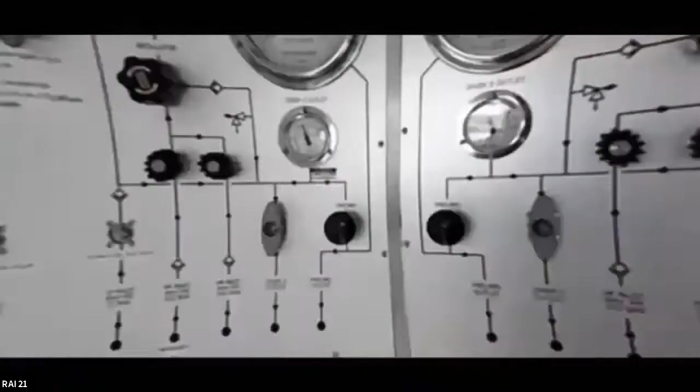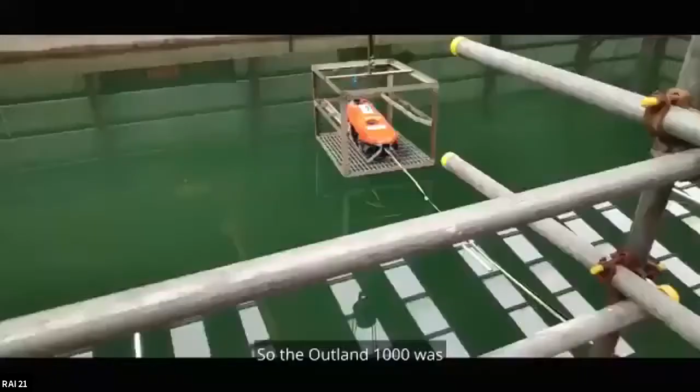So the technology that we're bringing from the oil and gas industry and demonstrating today is around cutting underwater. We've deployed 3 ROVs as part of this collaborative approach today to demonstrate the capabilities. The Outland 1000 was the first one to be deployed, and alongside that we had the VideoRay Pro 4. Today's been a good collaboration between the innovation teams and the end users - all in all, it's been a really successful day.

Demonstrations again at the dive team in WASDALE, and what we're doing today is to allow people to see the capability of what these ROVs can do for us. Having that ability to draw on other sectors in order to demonstrate what we're able to do, also allows us to get all aspects of both end users and operators in technical demonstration. We've brought experts in and we've made a difference.

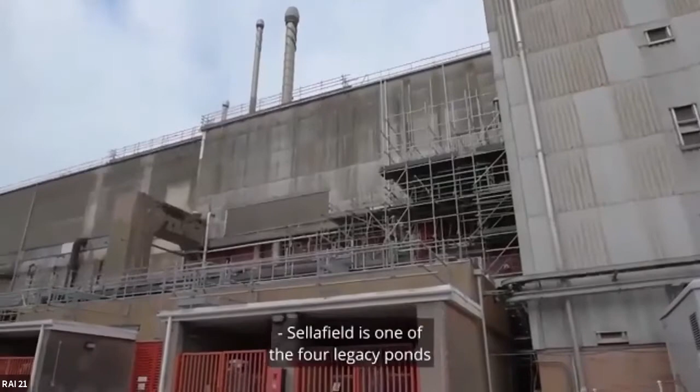Sellafield is one of the 4 legacy ponds and silo sites. The site comprises of 24 concrete silos that have been built in the early 1960s and extended 3 times since, and are still undergoing decommissioning. Each silo is the size of a double-decker bus, housing the waste within a body of water.

The site has never been designed to be emptied, so no plan was in place for removing the waste from these silos, making it challenging as the waste retrieval solution has to be designed around the current silo that can operate in a safe and reliable way.

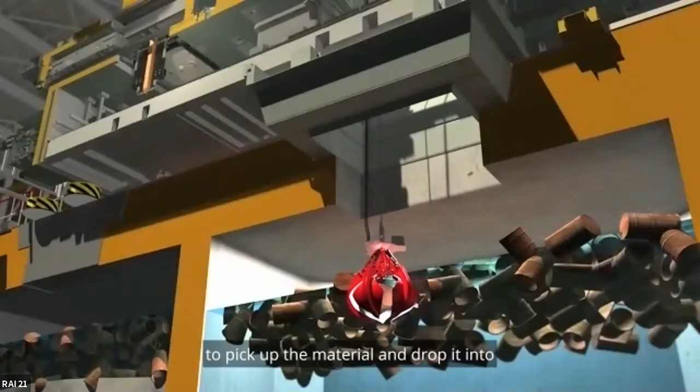Current removal operation consists of a large machine enclosing itself around the silo, which has a grabber that is lowered into the silo to pick up the material and drop it into an enclosed waste bin to be transported and treated, then safely housed, which will ultimately reduce risk to the public and overall costs.

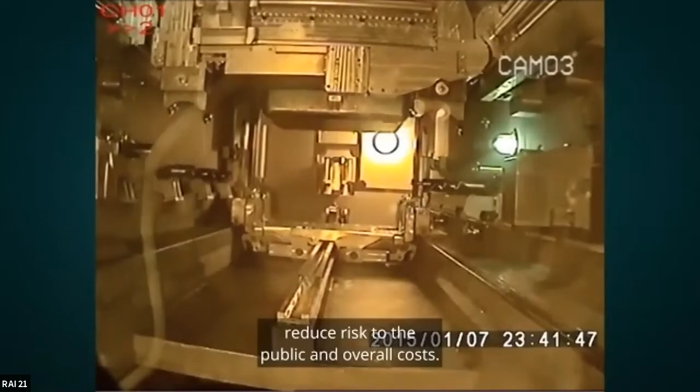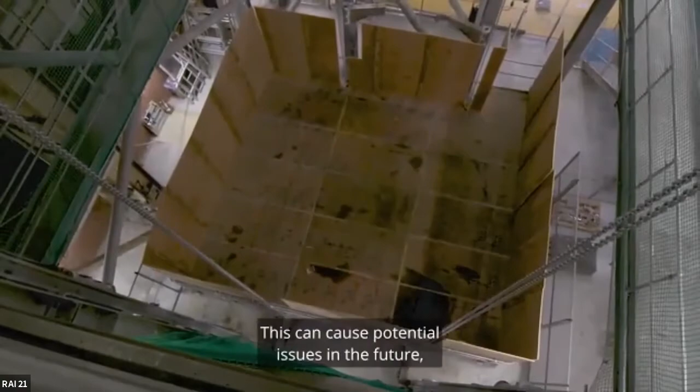Looking ahead of time, we can see that the current removal operations are mostly clearing out the center portion of the waste, leaving a buildup near the sides of the silos. This can cause potential issues in the future, one of which is not being able to clear the material around the edges, and another where the swarf collapses on itself, potentially trapping the grabber during its operation.

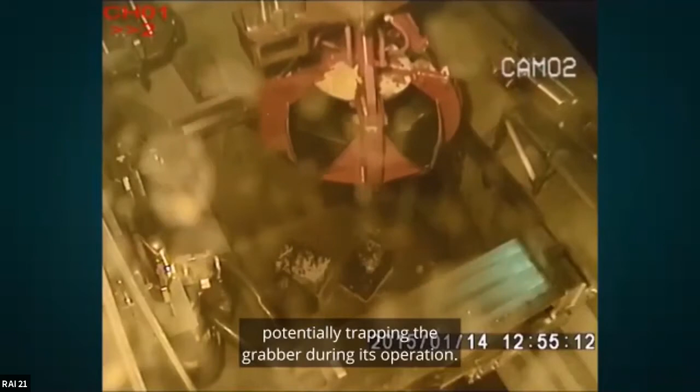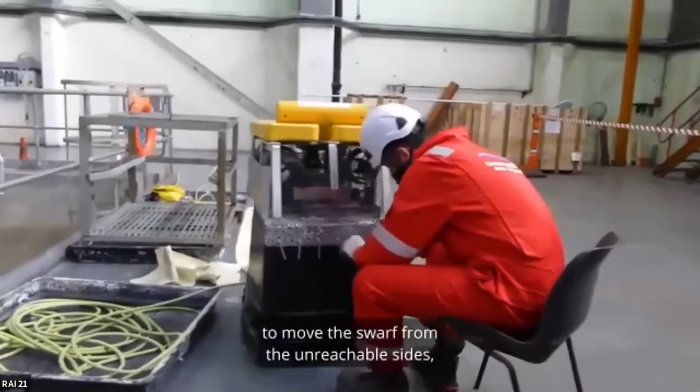To combat this, we are investigating potential solutions for the future, one of which is making use of an underwater remote operated vehicle, or ROV for short, to move the swarf from the unreachable sides, leveling out the waste and moving it into the space reachable by the grabber.

National Nuclear Laboratory, NNL for short, carried out the investigation on the potential of introducing the ROV as the solution, where the trials were conducted at the NNL's Workington site with the help from Underwater Vision ROV specialists, who supplied and modified the ROV for moving the swarf and sent trained professionals to operate it during these trials.

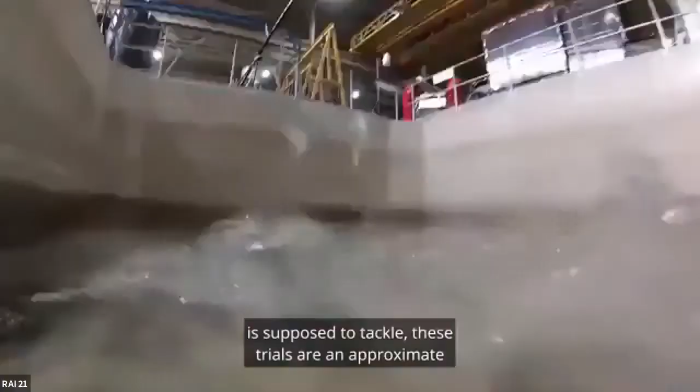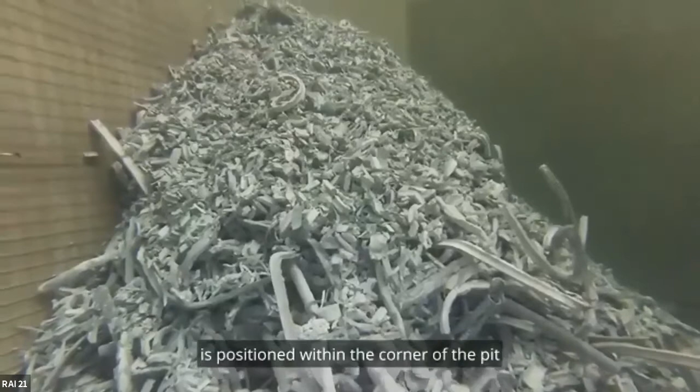To create similar conditions for what the ROV is supposed to tackle, these trials approximate what is expected to appear within the silos, where a simulated Magnox alloy swarf - just like the real stuff but without contact with nuclear material, so it's safe to be around - is positioned within the corner of a pit to simulate a buildup of the swarf.

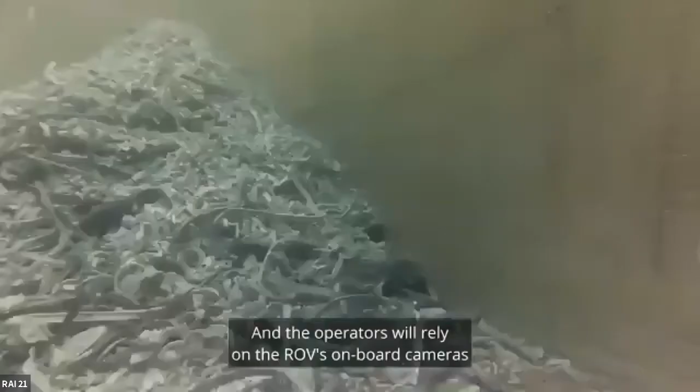In real-life applications, no one can enter the silo due to the hazardous material. To mimic these conditions, separating screens have been set up as a wall between the operators and the ROV, and the operators will rely on the ROV's onboard cameras to have a direct view of the scene, just like in real-life conditions.

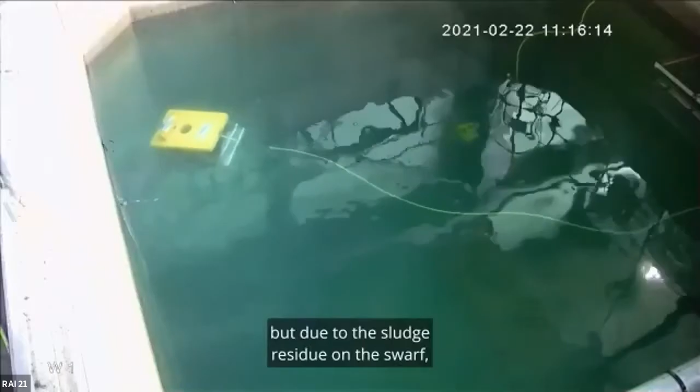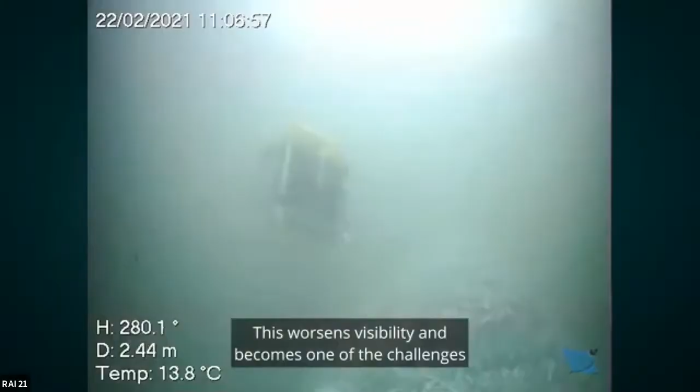The pit we're using to demonstrate the ROV is filled with clean water, but due to the sludge residue on the swarf, which is a further degradation stage of the swarf, the water becomes slightly clouded, which is what the water is within the silo too. This worsens visibility and becomes one of the challenges the ROV operators have to deal with.

During the trials, we've also had several cameras set up around the pool to capture the performance of the ROV as it shifts the swarf. We included another ROV equipped with an onboard camera to provide a third-person view to see if it will assist in operations, and to provide a safe and flexible method for recording footage underwater.

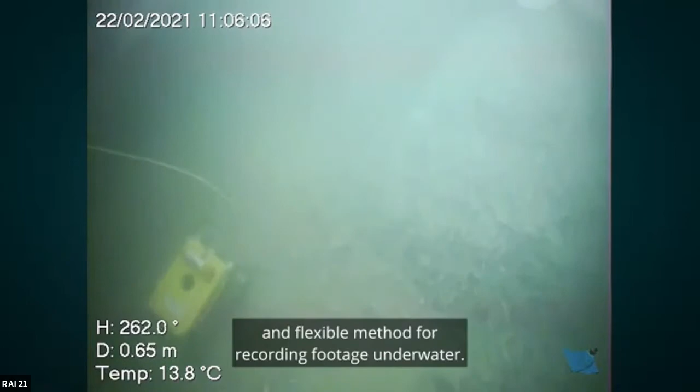The goal of these trials is to assess how easy it is to operate the ROV, to move the swarf, to find out if it's powerful enough to move and dislodge the swarf from the waste pile, and to evaluate the rate of volume shifted.

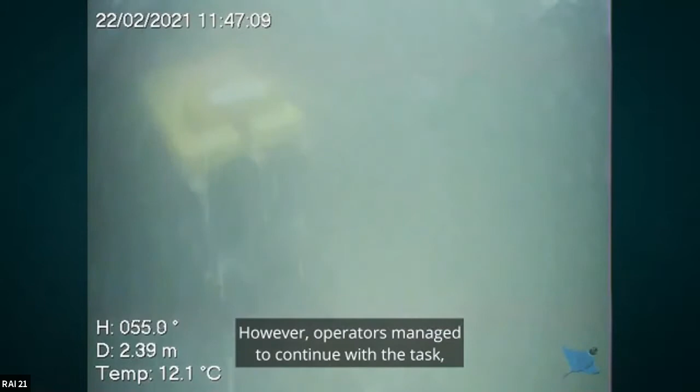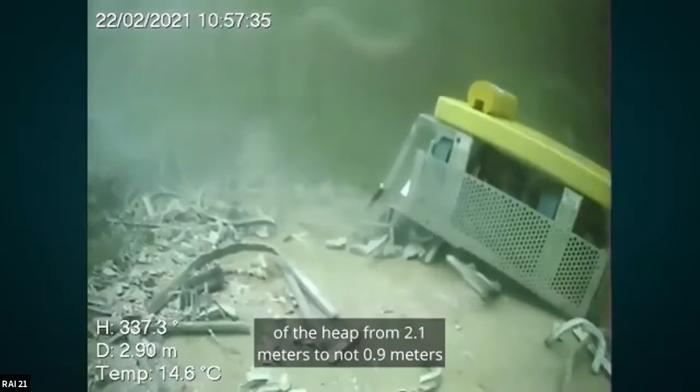During these preliminary trials, the visibility with the water became quite challenging. However, operators managed to continue with the task, shifting a significant amount of volume at a rate of 0.63 meters cubed per hour, and reduced the height of the heap from 2.1 meters to 0.9 meters across the 5 hours of trials. Overall, these trials have been very successful.

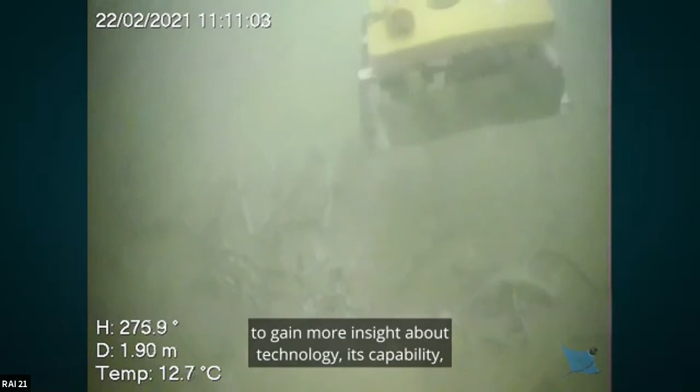It's given Sellafield and NNL the chance to once again reach out to collaborate with external companies to bring innovative solutions and the opportunity to gain more insight about the technology, its capability, and suitability on site in the future.

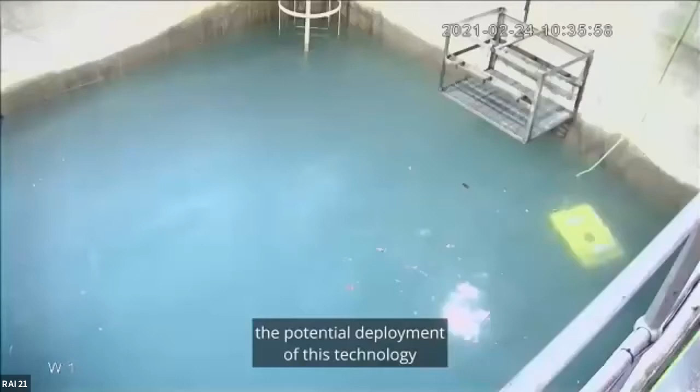The work towards implementing this technology will be reviewed and further investigated to ensure the potential deployment of this technology in the nuclear sector is done with confidence, reliability, and consideration for the future.

Now, James Kell will introduce some of the work being undertaken at Rolls-Royce to develop ways to inspect and maintain jet engines in situ.

Hello everybody, my name's James. I work for Rolls-Royce. I'm a technology specialist in the field of in situ inspection and maintenance. So what that means is we're interested in development of tools or techniques that we can take to an engine that's installed on an aircraft and perform some sort of surgery on it.

This enables us to ensure that the engine stays on wing or as part of the aircraft for as long as it's supposed to, and enables us to generate revenue that way, rather than taking it out of service, causing disruption to not only our customer, but to ourselves as well, when we have to put it through our own overhaul shops. So to do that, there's a lot of restrictions that we have around us.

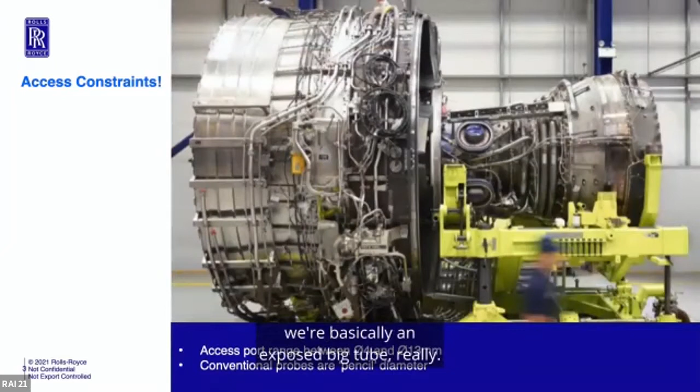So if you see on the second slide, when you walk up to an engine, all of the cowlings are down, and once you lift them up, you see on the third slide, we're basically an exposed big tube, really. And what that tube has is a range of inspection ports that go from about 4mm to 13mm. And that's really all we have as a way of getting inside to perform some sort of corrective surgery.

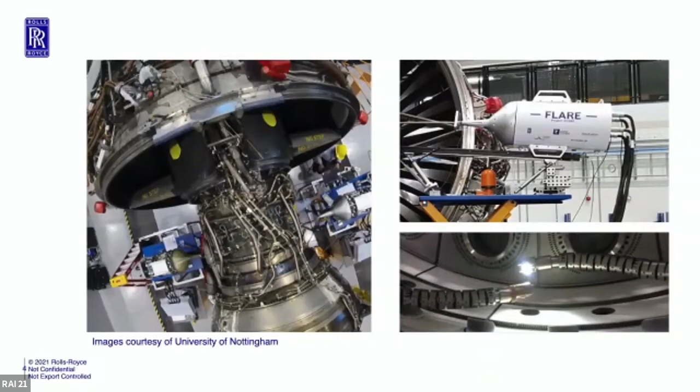And we're pretty good at that. Our teams are very good at going out and performing lots of routine visual inspections or non-destructive testing inspections like ultrasound, eddy current, etc., to look for anomalies. But also we're quite good at performing repairs too, with off-the-shelf pieces of kit, and with lots of skill from our skilled mechanics.

But there are other things we're interested in doing as well, like the more tricky tasks, for example. And that's the kind of thing where we've been looking at developing our own supply chain, because there's lots of this stuff that doesn't exist already.

So we've had to go back to the drawing board in lots of ways and work with universities and other technology suppliers to put together a big, long technology supply chain that results ultimately in a device that we could go and use. You'll see that there's a huge amount of customization that's been placed on those things.

As an example, I'll show you the first video, which is to do with a robotic bore blending device that we devised, working with the University of Nottingham and funded by the Aerospace Technology Institute. You'll see in this video a collection of clips that describe some of the issues we face on a day-to-day basis.

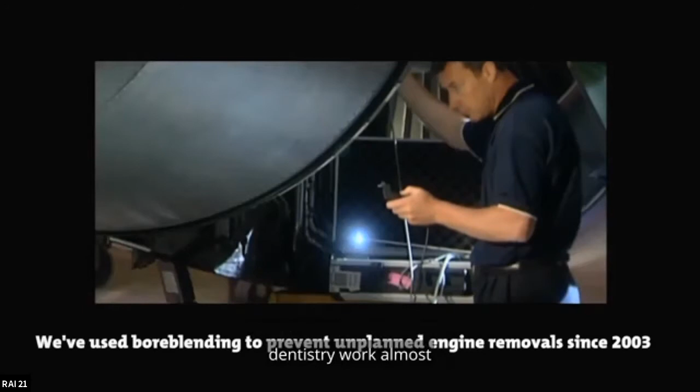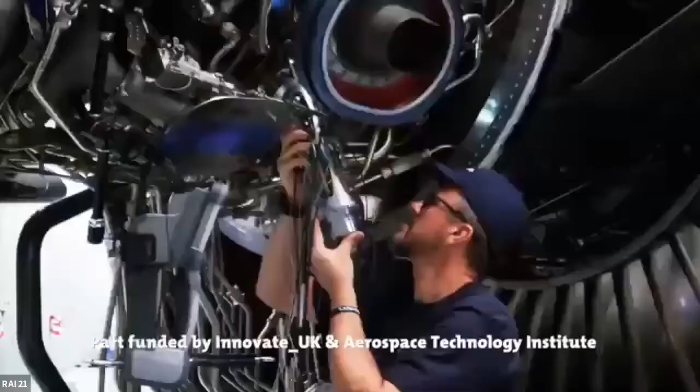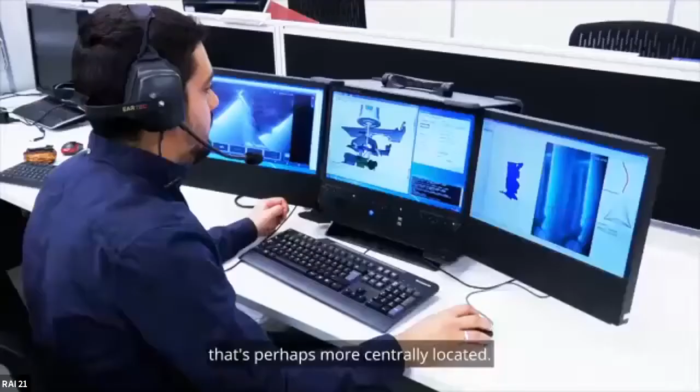We've got an example of a colleague doing some effectively like dentistry work almost on a compressor blade to remove a piece of damage. But what we did with the University of Nottingham in this case is devise a robotic way of doing such a thing. So we thought, rather than sending the person to the job, we could have a collection of robots placed out in the field that could be remotely controlled by a person more centrally located. This means our specialists can be better utilised, and we have potentially a better or quicker speed of response.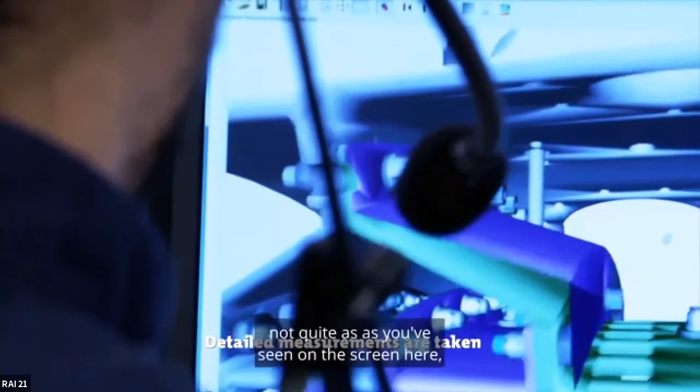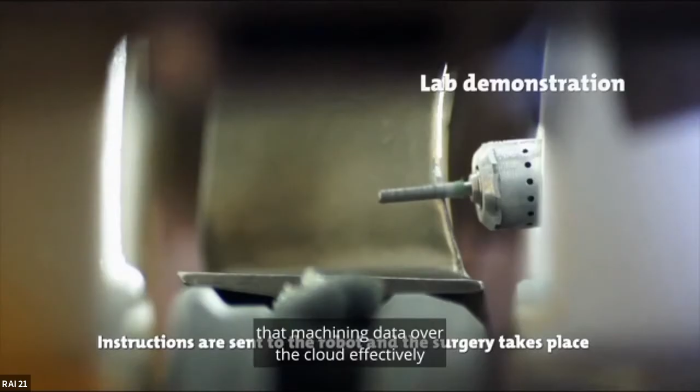So this is all done in the lab at the moment, just demonstrating that in a lab environment. Actually it's a few years old now. We're in a place where we've used a lot of this technology in different ways, not quite as you've seen on the screen here, but what's going on is we're creating a virtual representation of that blade, and then sending that machining data over the cloud effectively to a robot, which then performs the surgery and enables us to put the engine back together and let it go on its merry way.

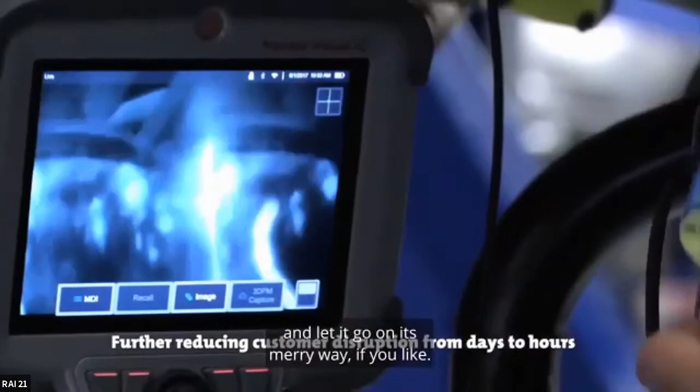So that's one example really of how we've looked to develop our own special tool to provide us with a way of performing corrective surgery.

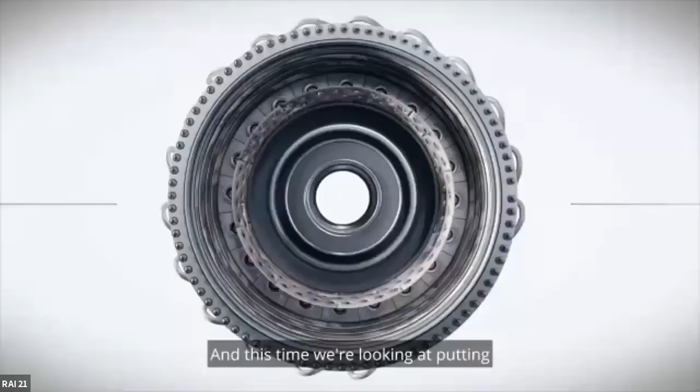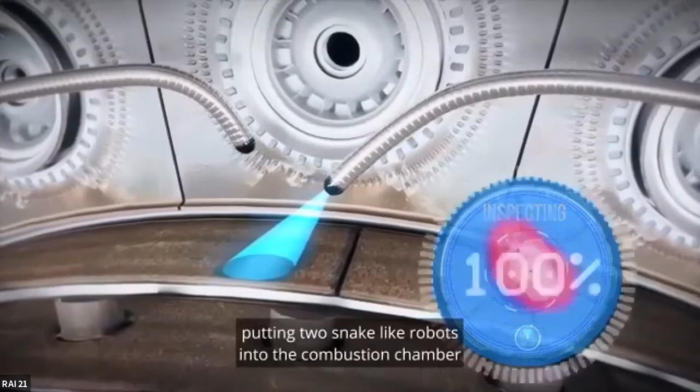I'd also like to show you another animation, this time of another project in a similar vein, both in terms of it being intended for in situ or on-wing use, and this time we're looking at putting a coating back on rather than removing material as you saw in the previous video. In this case, we're looking at potentially putting two snake-like robots into the combustion chamber, so they can work in a collaborative or combined way to firstly inspect the area of coating in question, and then also clean it up and put some coating back on.

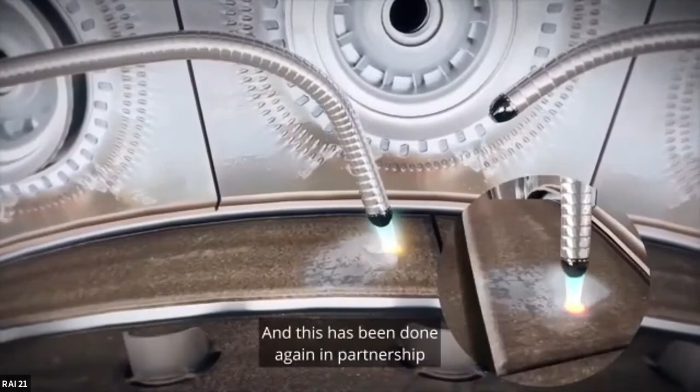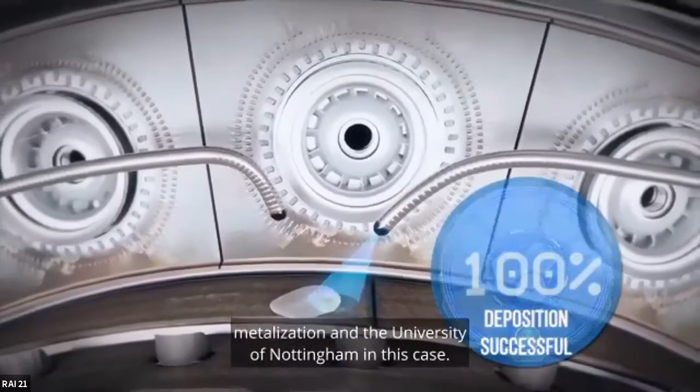This has been done again in partnership with the Aerospace Technology Institute, part of an Innovate UK funding, with our partners Metallisation and the University of Nottingham. Metallisation have been working on a flame spray application method, and the University of Nottingham have been using their expertise in making snake-like robots for our needs and uses.

But really this just hints at the fact that there's nothing really out there off the shelf that we can put our hands on and use, other than things like flexible video scopes, for example, which are great, but they're limited, and we can do some really good remote visual inspection with them. But when we have to look at more tricky tasks, such as putting coatings back on and performing repairs where we require some skill to actually remove some damage...

That's when we're basically into customized robotics. And we really wouldn't be that keen to be doing customized robotics because it takes a long time to develop, and it's relatively costly in terms of putting in our own funding to do so. But it just feels like there ought to be a better way. There's plenty of stuff I'm sure that we've developed with our own customized things, and I'm sure you've seen with other sectors that Kevin will have introduced from a National Robotics Network perspective, whereby we could use potentially some other of those building blocks to get to our solution quicker.

And likewise, we feel like potentially we've also broken ground in some areas where we might have some transferability to other areas of interest.

So kind of outside of our own sector, potentially even into the medical world, for instance. It'd be great if things went full circle, because some of the things we've been doing have their basis and genesis, if you like, in the medical industry. And really, if we're able to take things back into the surgery world, that would be a wonderful kind of closing of the circle.

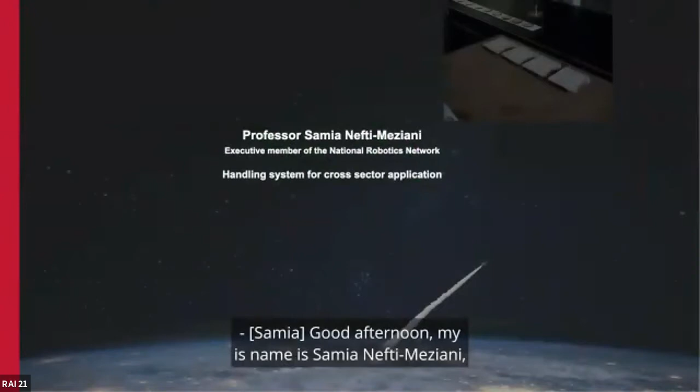Good afternoon. My name is Samia Nefti-Meziani. I'm Professor of Artificial Intelligence and Robotics. I'm an Executive Member of the National Robotics Network. My talk will be about handling systems for cross-sector application.

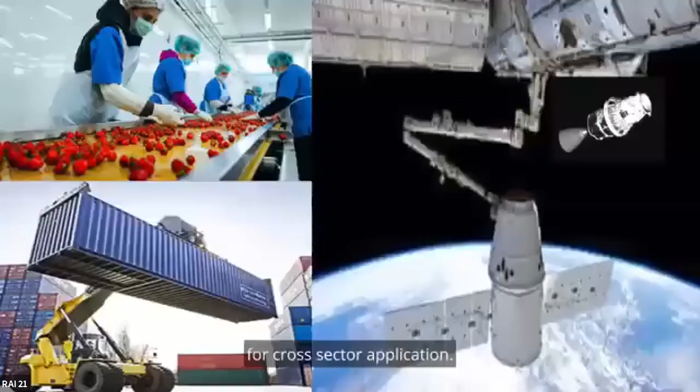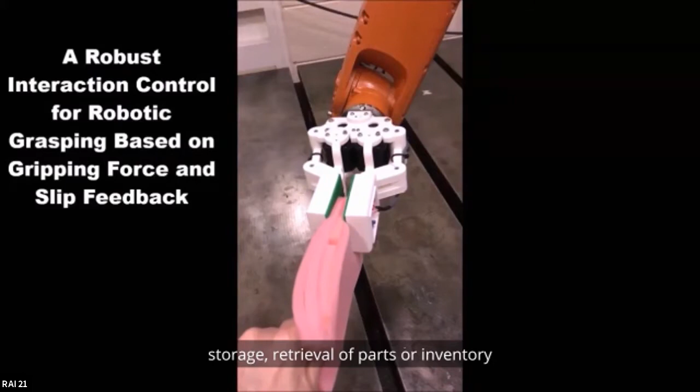One of the main common problems that different industry sectors face is the handling of products. For example, in material handling and logistics, there's a requirement for one handling system that could be used for packaging, construction, material movement from place to place, storage, retrieval of parts, or inventory, without having to change end effector all the time. Similarly, in the space sector, spent rocket stages consist of about 18% of space debris.

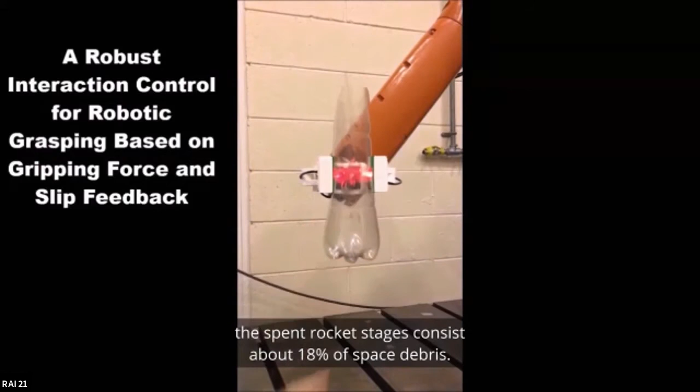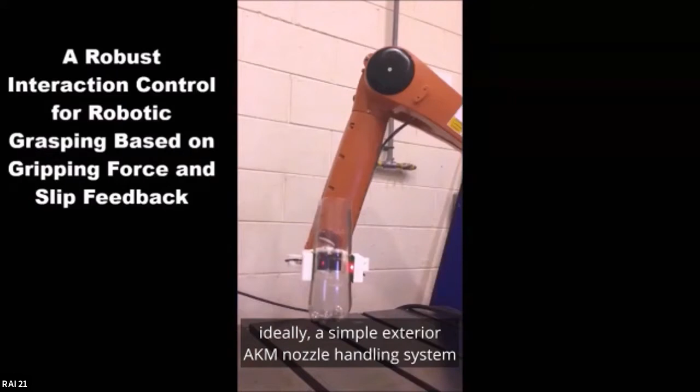Removing orbital debris, known as non-cooperative targets, using a robotic arm will ideally require a simple, dexterous, AKM nozzle handling system that is versatile and able to capture various non-cooperative space targets without prior knowledge about the object, and ideally also without the need for a vision system, which could be a problem in this type of environment.

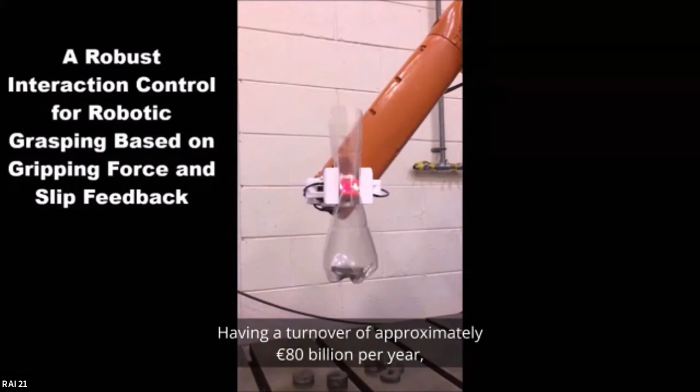Another interesting sector where a handling system is required is the food sector. Within the UK, food manufacturing is by far the largest manufacturing sector, with a turnover of approximately 80 billion euros per year. Despite its enormous size, the food industry has been slow to see the benefit of automation.

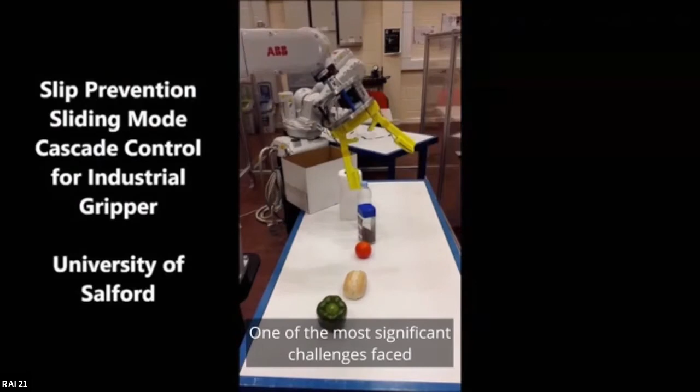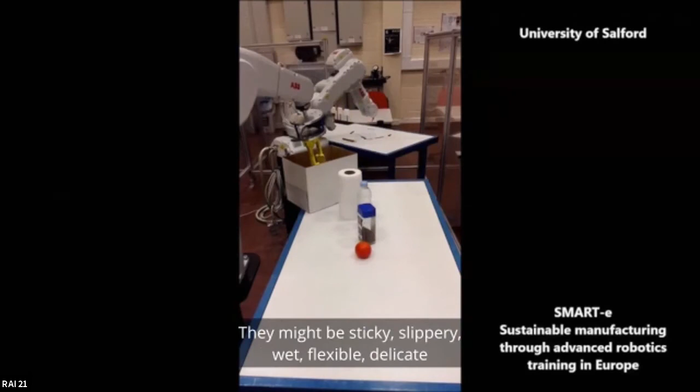One of the most significant challenges faced by the robotics and automation industry is grasping food products. Food products can vary enormously. They might be sticky, slippery, wet, flexible, delicate, or deformed when handled. This means that traditional end effectors such as vacuum or jaws cannot be used.

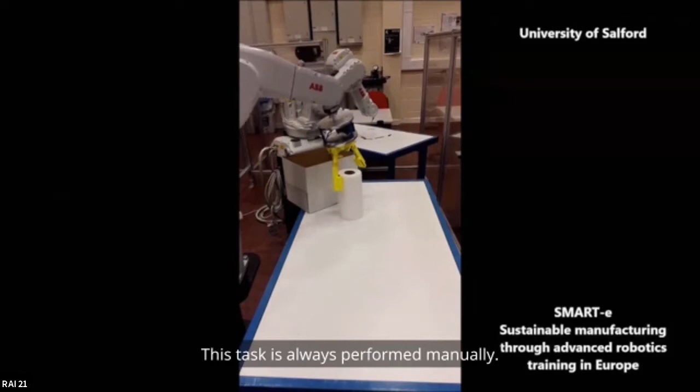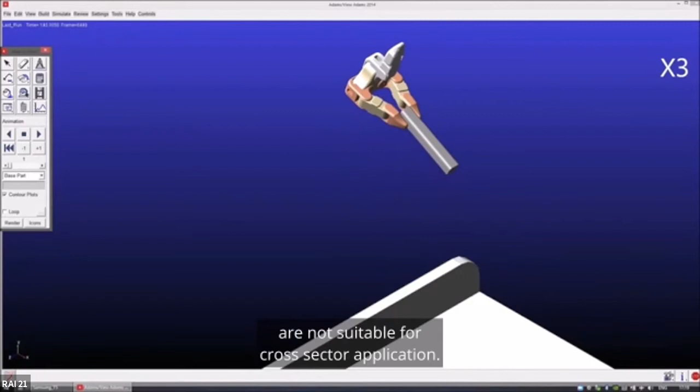Therefore, there's a need for building a multifunctional gripper that could ideally be used across 3 sectors. When you look at off-the-shelf robotic grippers, they are not suitable for cross-sector application. Typically, they have limited dexterity, are suited to one or a small number of products only, and have little or no feedback touch at all.

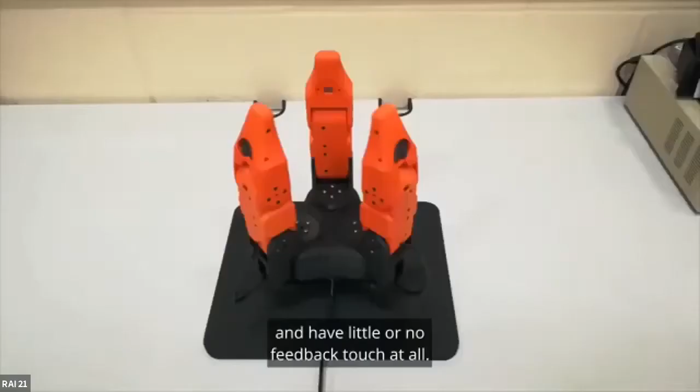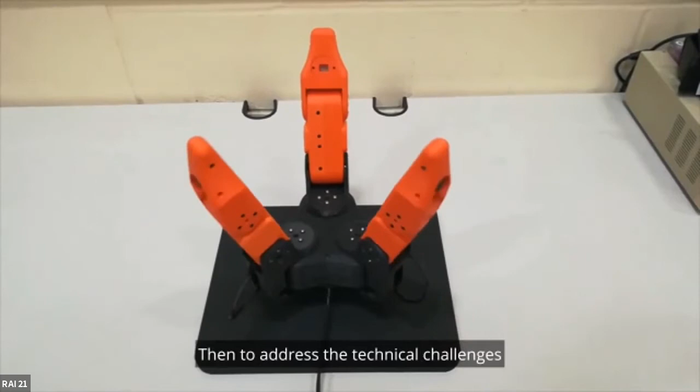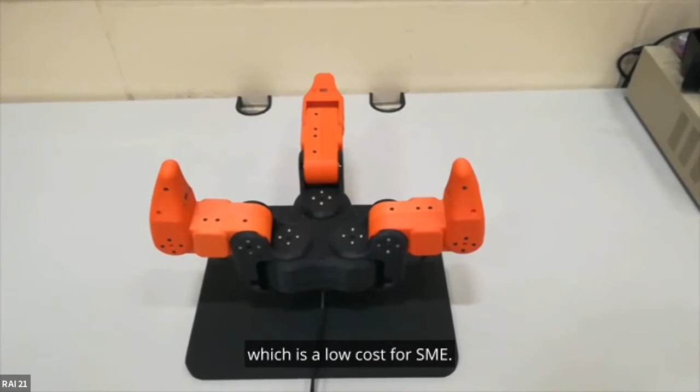They are suitable when all the products are identical, but what about when the product size has large tolerance? What about delicate, deformable products, or if the held, lifted object slips? To address these technical challenges for a cross-sector technology, we have developed a multifunctional and multi-purpose gripper which is low cost for SMEs. We've added more capability to the gripper to allow manipulation and regrasping actions that change the pose of the held object in the hand, making it more dexterous.

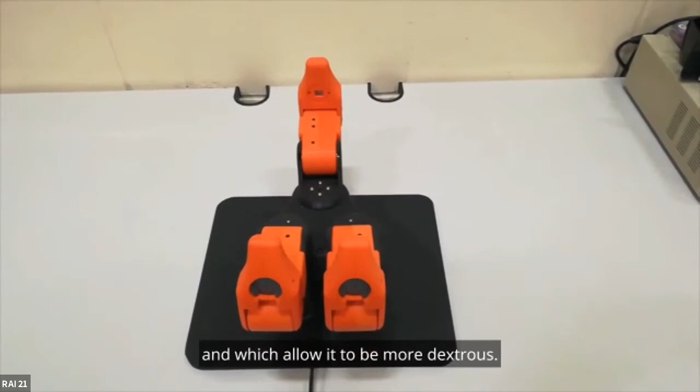For this gripper, gravity, inertial motion, and external contact from the environment can be cleverly exploited to change the pose, as you could see, of the grasped object relative to the hand.

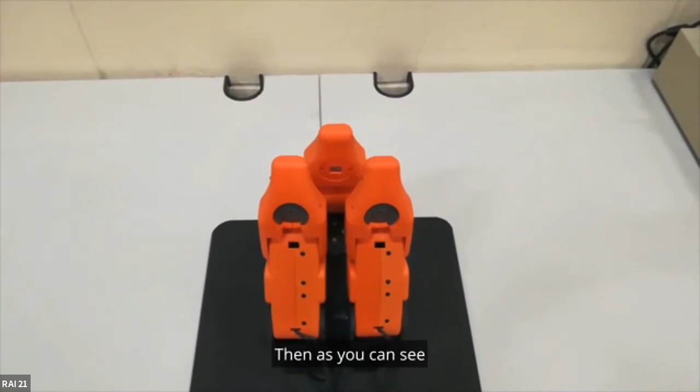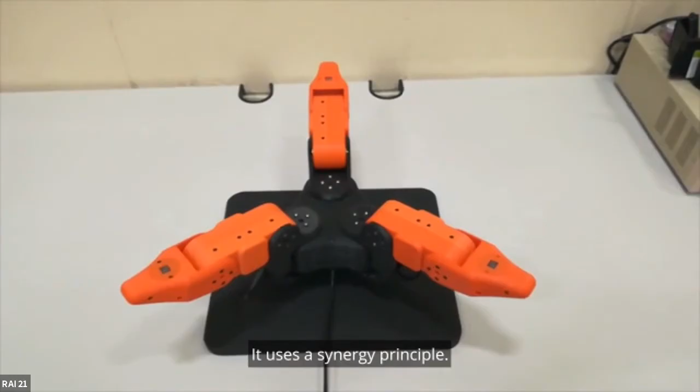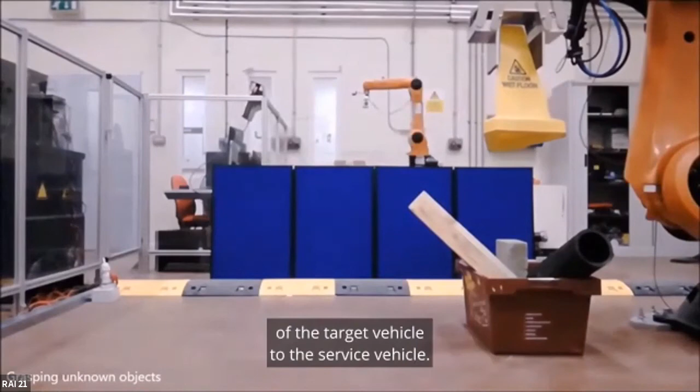One arm acts as the manipulator of the service space vehicle, while the second performs the relative movement of the target vehicle to the service vehicle. This test bed is also used to show the collaboration between the two grippers in space.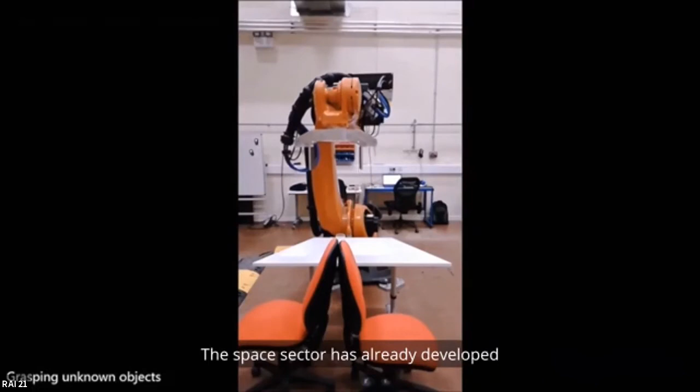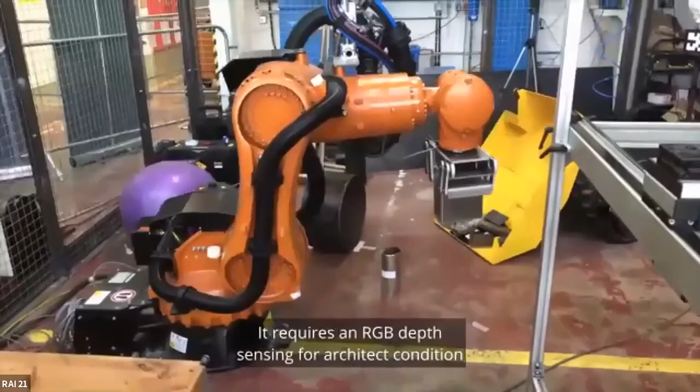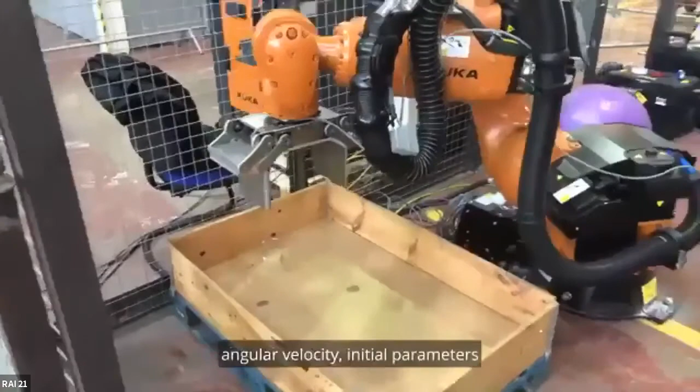The space sector has already developed a grasping method using an off-the-shelf gripper. However, it's not a multifunctional gripper. It requires RGB-D sensing for orbital conditions, and it also requires state and parameter identification such as pose, angular velocity, inertial parameters, grasping point, and contact points.

Again, the same gripper has been used for packaging, construction, and material movement from place to place, as you could see. Finally, we have extended the use of that technology to another sector, which is nuclear. As you could see, the same handling system is being used to grasp objects in the nuclear use case.

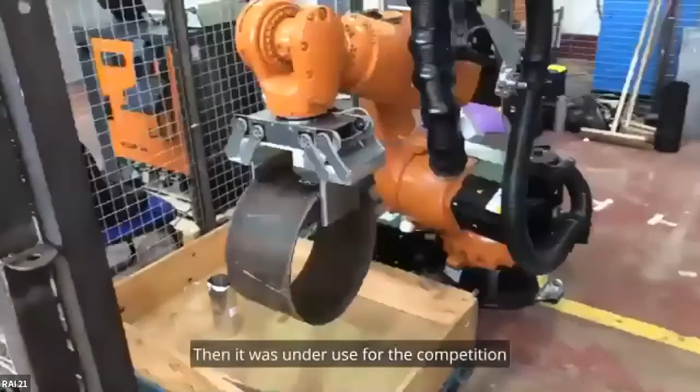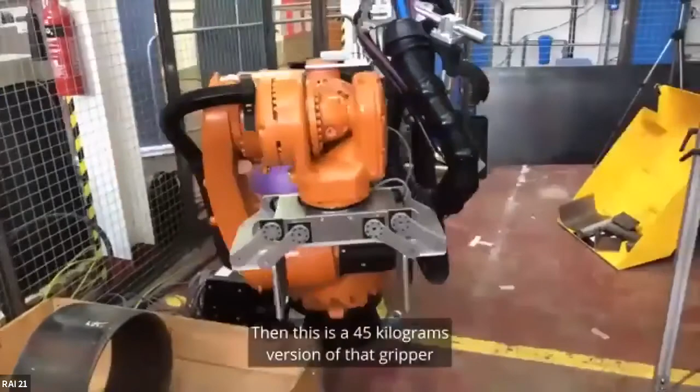It was used for the competition funded by NDA, Sellafield, and Innovate UK, based and led by Jacobs. This is a 45-kilogram version of that gripper, and we can see the performance of it in this sector as well. Thank you.

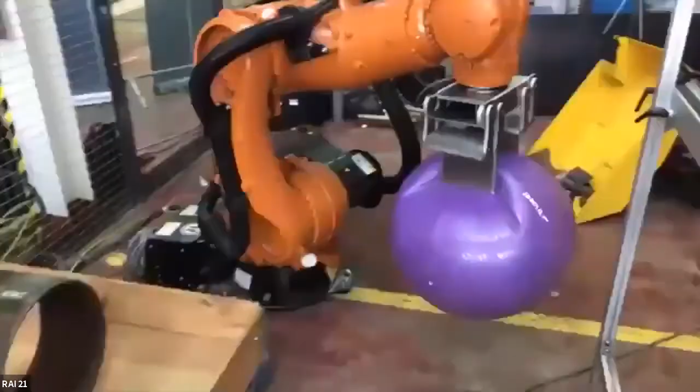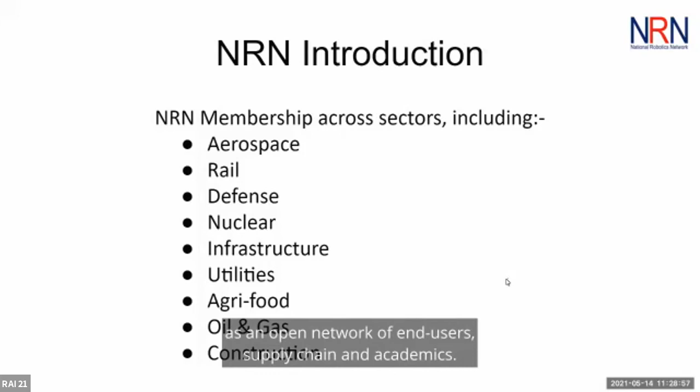The NRN was formed by the industry partners of the EPSRC Autonomous Intelligent Systems Partnership Programme. The industry partners came from a variety of sectors but very quickly realised they had similar challenges. With the help of KTN, we have continued to work together as an open network of end users, supply chain, and academics. As you can see from the list, we operate in a wide range of sectors.

We believe that cross-sector collaboration will benefit both the end users, with affordable solutions, and technology providers, with a greater market opportunity.

The NRN is end-user driven because we need industry pull to identify useful technology and applications. Industry pull will enable new developments to bridge the valley of death, because the final stages of implementation require end-user support.

Many sectors have specific supply chains. RAI technology is often very bespoke and therefore expensive, and has not been widely adopted, particularly in smaller businesses. Greater market understanding beyond a specific sector provides the opportunity for bigger volumes and therefore cost competitiveness.

The whole ecosystem, from academia to end users, all have their part to play, whether it is communicating needs or developing solutions. These activities cannot be done in isolation.

One of the biggest challenges for RAI technology is to be adopted by smaller businesses in the UK. They need affordable RAI technology that can be adapted to suit their business needs. This may drive us towards more modular systems rather than bespoke.

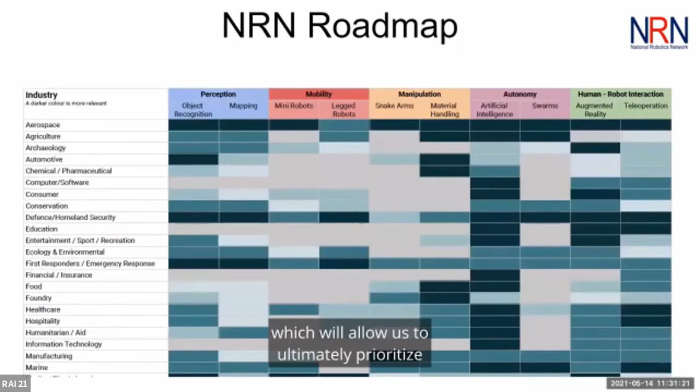We have identified 5 key themes and 10 areas of collaboration that we believe will have significant opportunity for development across multiple sectors. These are sensing and perception, mobility, manipulation, AI and autonomy, and human-robot interaction. The key themes and areas of collaboration have been mapped out against a number of sectors, which will allow us to ultimately prioritise the development opportunities.

There are, of course, many barriers to common supply, but the benefits outweigh them. Affordable and flexible RAI solutions come with volume, and industry and task bespoke solutions will remain unaffordable for many end users.